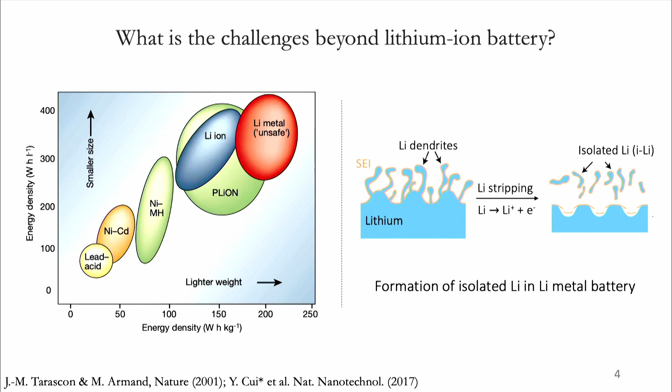So we were thinking, is there any way that we can recover this part of capacity just using an electrochemical method? This is the fundamental question that we want to ask.

So we started our project by looking at the electrochemical potential inside a battery. Here on the left we have the cathode, and on the right we have the anode. The cathode's electrochemical potential is higher than that of the anode. At open circuit voltage, when we are not using the battery, there is a flat line in the electrolyte in between them, so no electron is moving.

Things start to change when we charge the battery. Here we are showing the charging process: we elevate the electrochemical potential of the cathode while lowering that of the anode. By doing so, we drive the electrons through the external circuit, but at the same time we are generating an electric potential gradient inside the battery, as shown here.

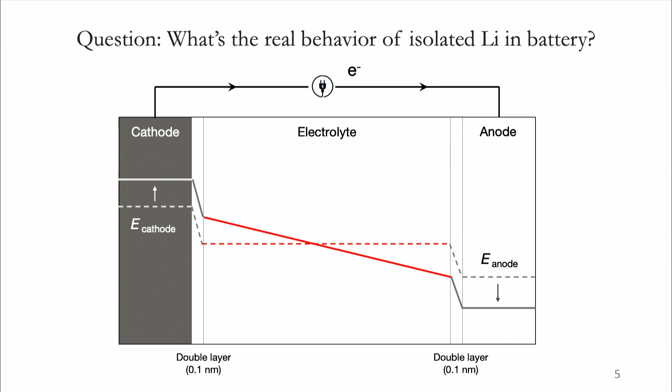What if at this time we have a lithium filament in this electric field? Will this have any influence on its behavior? That's the question we are trying to address here.

Here is a simplistic illustration of the scenario we're imagining. We have the cathode and the anode, and some isolated lithium that formed during the previous charging and discharging process. It's embedded either within the solid electrolyte interface or in the electrolyte.

During the charging process, we have an electric field pointing from the cathode to the anode. But lithium is an electron conductor, a very good one, so it will be polarized by this electric field, generating surface charges on both of its surfaces.

On one side, it will have a large accumulation of negative charge, and on the other side, an accumulation of positive charge, or electron holes. This kind of accumulation of positive or negative charge will disturb the equilibrium state at this interface.

The accumulation of negative charge will drive the lithium ions in the electrolyte to be deposited onto this filament. On the reverse side, the accumulation of positive charge will drive the lithium metal to dissolve into the electrolyte. The net outcome of this asymmetric deposition and dissolution is a spatial dislocation of this filament toward one of the electrodes.

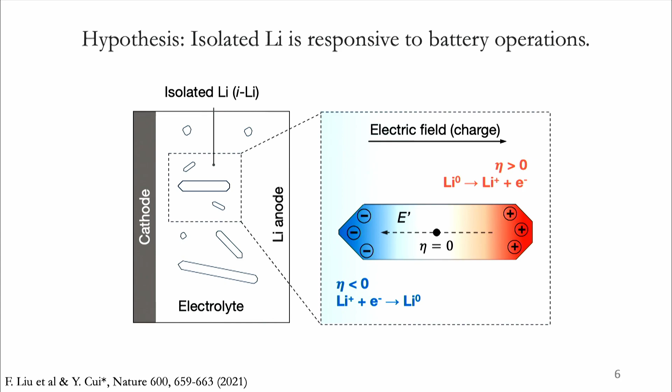For the case we're seeing here during the charging process, it moves toward the cathode side. During the reverse process, during discharging, it moves toward the anode side.

So this is based on hypothesis. How about - can we observe it? Before we designed our own setup device, we looked at literature to see what people have been observing for the last 20 or 30 years.

This is work done at the University of Michigan. They looked at the surface of lithium and the electrolyte during the lithium deposition process. You can see the formation of mossy lithium during the deposition process and also its dissolution process. This kind of mossy lithium consists of thousands of lithium filaments, and we are seeing it under an optical microscope.

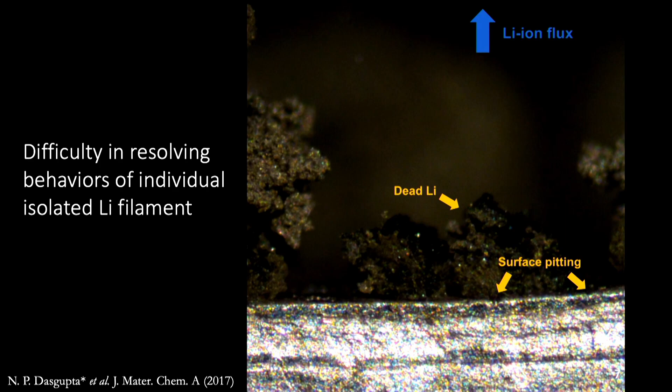As you can see here, it's really hard to tell which filament is connected and which is not. It's even harder, or nearly impossible, to see whether they have any kind of movement. That's why, for the last 30 years, we have formed this consensus that once those isolated lithium become detached from the surface of the electrode, this part of capacity is permanently lost. We also gave it the name dead lithium.

So instead of using a two-electrode structure, we designed our own device with a third electrode in between them. We patterned a copper strip as an island between two electrodes, lithium and NMC cathode, and then we electrochemically deposited lithium metal on it to serve as a lithium island.

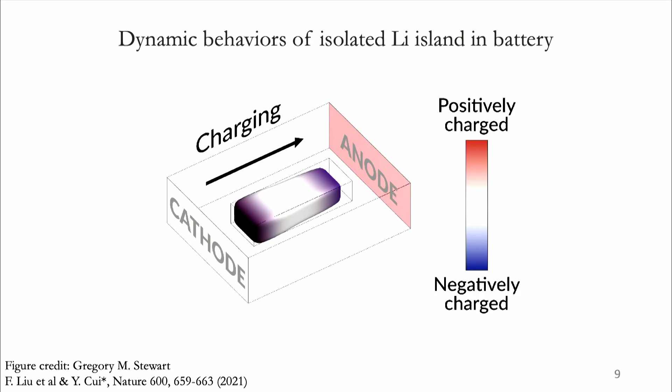If we put those observed phenomena together, it's like if we use the same current density during charging and discharging, this lithium filament will move back and forth between the two electrodes until it's completely consumed. But our opportunity also lies in this phenomenon, because the rate of this movement is dependent on the current density. So what we're trying to see is whether it's possible to manipulate the behavior of the filament to help it move toward the anode side, to reestablish this electrical connection and recover this partial capacity.

This is one of the demonstration experiments we did with half cells. Half cells are based on copper and lithium, to eliminate the influence of the cathode part. Basically, the performance we're looking at is on the copper side.

During this experiment, in the first cycle we want to form a certain amount of dead lithium, or isolated lithium, on the copper electrode, and during the second cycle we want to see whether we can recover it. During the first cycle, we form 0.37 milliamp-hour per square centimeter of isolated lithium on the copper electrode, and during the second cycle we still do deposition, meaning we are charging the battery.

Now we are gradually lowering the cell voltage or the electrochemical potential of copper to deposit a certain amount of fresh lithium onto the substrate. Then we start to strip it away using an electrochemical method. But during this time, we are not only stripping away the fresh lithium we just deposited, we are also promoting the growth of isolated lithium toward the copper substrate. That's why we're seeing over 100% Coulombic efficiency in this case.

Coulombic efficiency is the ratio between delivered capacity versus stored capacity. That means the previous inactive capacity is actually being reactivated during the second cycle. Without isolated lithium presence, the Coulombic efficiency of the batteries is usually about 92 to 93%. The difference between those two cells is the capacity we generated during this cycle.

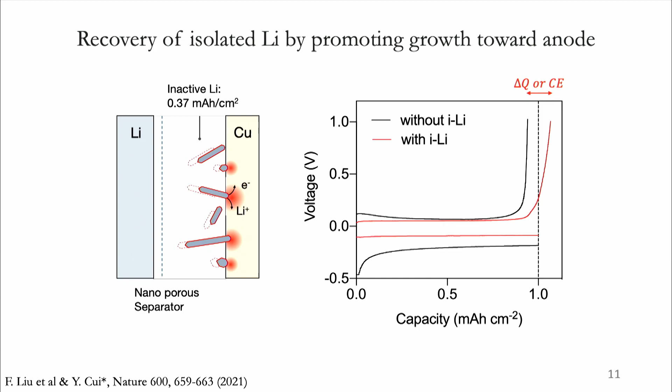So this is a very newly discovered electrochemical phenomenon. How can we use this kind of phenomenon in real applications? Here I want to give you 3 examples. The first one is lithium metal batteries, where we actually studied it.

To utilize this fundamental research, we developed a new charging protocol to implement this understanding. Not only do we want to charge the battery, but we also want to implement a short, fast discharging step to recover the previous lost capacity. By doing so, during every cycle we use about 4% of battery capacity, but in the long run we extend the battery lifetime by 30%.

Another example is fast charging of lithium-ion batteries. This is one of the major concerns from customers hesitant to purchase electric vehicles. During this fast charging process, isolated lithium also forms on the graphite electrode. But by using this kind of activation protocol, we can dramatically extend the lifetime of lithium-ion batteries even after the fast charging process. Another potential application would be to regenerate or recycle used batteries.

This can become extremely important after a few years when we have a large amount of batteries retired from transportation. What if, before recycling them, we just draw out the raw materials from the batteries? Can we give them a second life just using an electrochemical method? And that's something we think

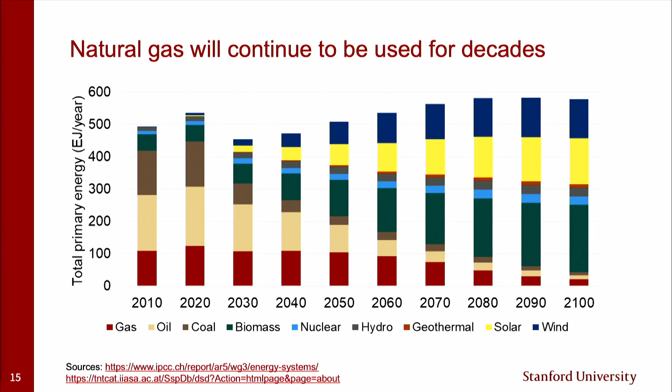Therefore, it is important that, now that we are still using and producing this much natural gas, how can we limit the climate impact of producing them? What is the climate impact of producing natural gas?

In 2010, the IPCC estimate for global anthropogenic greenhouse gas emissions is about 50 gigatons of CO2 equivalent. Although CO2 contributes the most of it, methane, or CH4, also contributes a significant 16%. About 1/10 of that global CH4 emissions are from the US. The US EPA, Environmental Protection Agency, estimated that about 32% of US methane emissions are from the oil and gas sector. So if we apply this share of methane emissions from oil and gas globally, this can easily become a gigaton challenge in terms of CO2 equivalent.

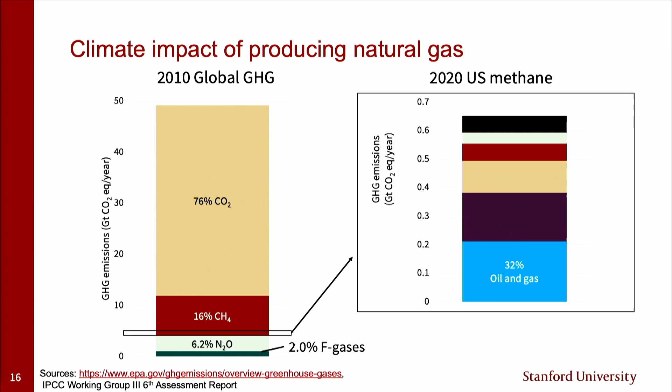Actually, to say this is a gigaton challenge is an understatement for at least 2 reasons. Number one, this chart converts the CH4 into CO2 equivalent, assuming methane's global warming potential of 100 years at about 30. However, due to the relatively shorter lifetime of methane in the atmosphere, curbing methane emissions can have more immediate climate benefits. If we apply a 20-year methane global warming potential of over 80, then the climate impacts of methane here will increase by 3-fold.

And the other reason for an underestimate is that we know for a fact that this number estimated by EPA is an underestimate. So how much methane is actually emitted from the US gas supply chain?

In 2015, the EPA Greenhouse Gas Inventory, or GHGI, estimated 8 megatons of methane emitted from the oil and gas sector. For the same year, Alvarez et al. compiled more recent studies and generated an estimate, widely accepted in academia, saying that actually more than 60% above the EPA estimate, or 13 megatons in total, is emitted from the system.

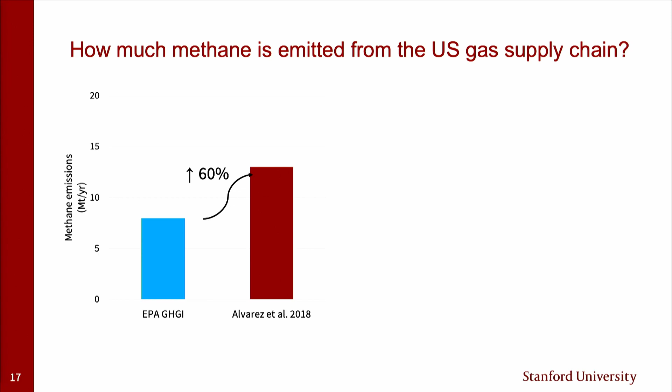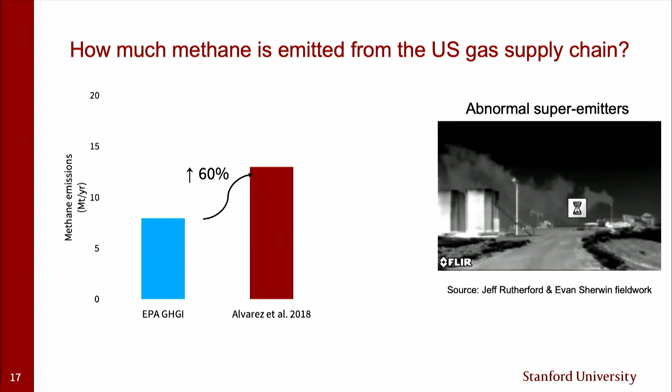However, more recently, we have found that there are many more super emitters, as shown in this infrared footage done by Jeff and Evan of our group, showing that these abnormal super-emitting events—of sizes of tons per hour, or even tens or hundreds of tons per hour—are actually more common than we expected. Although these events are rare, because of their huge sizes they can contribute disproportionately to total emissions. If we take into account these abnormal super emitters, we know the actual total emissions from oil and gas methane will actually be higher. But the question is, higher by how much?

And a large sample is important because we are interested in detecting and understanding these infrequent super-emitting events.

So we, as the Stanford team—the Environmental Assessment and Optimization Group led by Professor Adam Brandt—verified the quantification performance of their technology via single-blind controlled releases of methane. We on the ground released compressed natural gas from tanks, and they on the airplane measured it and reported to us what they found. What we found is that the technology works great.

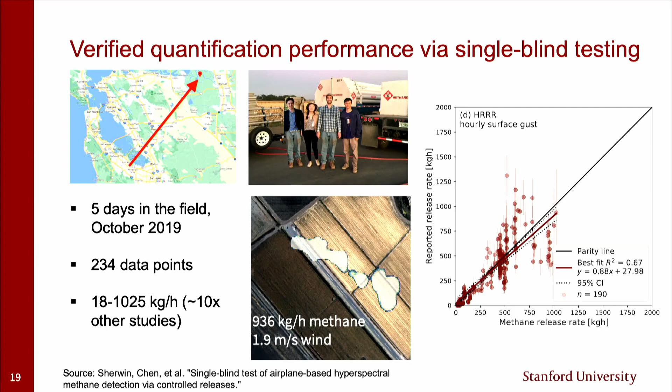So Kairos Aerospace repeatedly visited the oil and gas facilities in the New Mexico Permian Basin. The Permian Basin is now the largest and fastest growing oil and gas producing basin in the US. The way they sample this area is like this: they first fly to the predetermined polygon and cover a stripe of it, then turn the flight around to cover a partially overlapping stripe. They do this over and over again until the entire polygon is covered in a long mowing-lawn fashion.

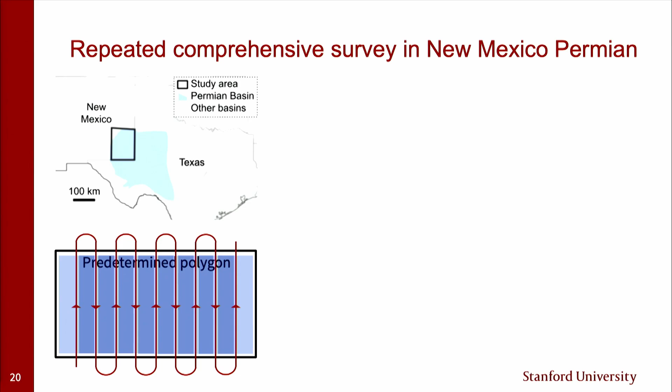Within just 115 flight days, from October 2018 to January 2020, Kairos was able to cover over 90% of the facilities in this area, which encompasses over 30,000 wells and over 15,000 kilometers of pipelines. The color on this map indicates the number of visits to these individual wells. On average, each well in this area was visited 4 times. Not only is this a comprehensive survey, it's also a repeated comprehensive survey, which has never been done before.

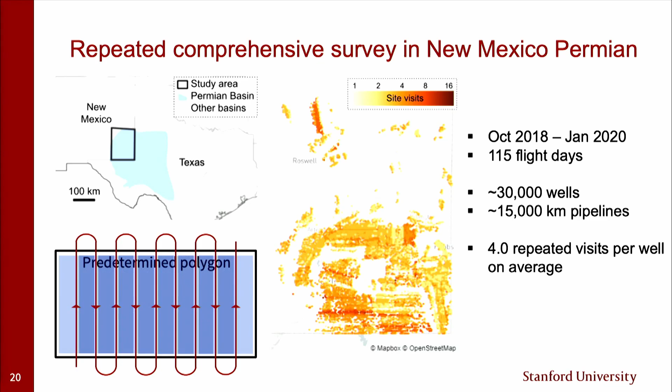What we found was that the data from this survey is quite astonishing. In total, we quantified 153 tons per hour of directly measured emissions in this area. We also measured the total emissions, which takes into account emissions below Kairos's detection threshold and from assets not covered by Kairos in this area. 194 tons per hour of methane corresponds to 9.4% of the gas production here, which is much worse than the EPA's GHGI estimate of just 30 tons per hour—and that 30 tons per hour is even after accounting for recent production growth in this area.

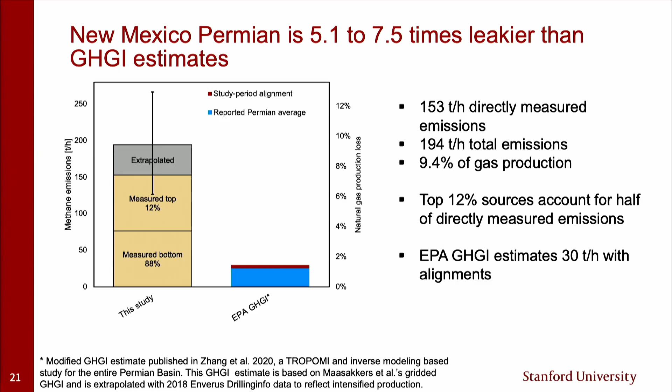What's also interesting to point out is that the top 12% of the sources detected by Kairos account for about half of directly measured emissions. This is actually good news and bad news. It's bad news because we know that EPA misses these infrequent events, but these infrequent events—the top 12%—are actually what matters and what drives total emissions. It's good news because once we handle this handful of these super-emitting events, we can get halfway there on emission mitigation.

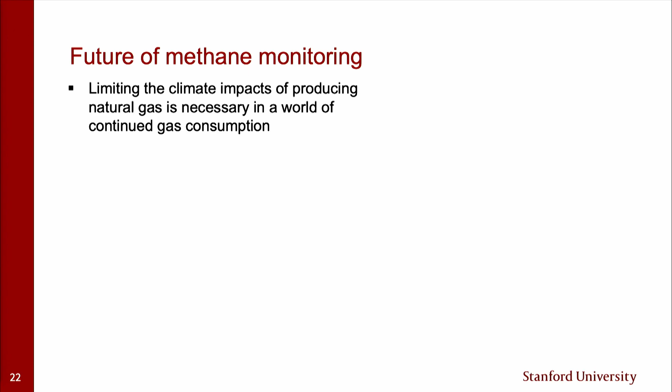So to conclude, we know that limiting the climate impacts of producing natural gas is necessary in a world of continued gas consumption. And aerial surveys have unfortunately unveiled a leakier system, at least in New Mexico's Permian Basin in 2019. The entire situation is quite concerning.

Some producers are better than others, but overall, the actual methane emissions from oil and gas can be 5.1 to 7.5 times higher than the EPA estimate. And we also found that the aerially detectable super-emitters account for the vast majority of total emissions.

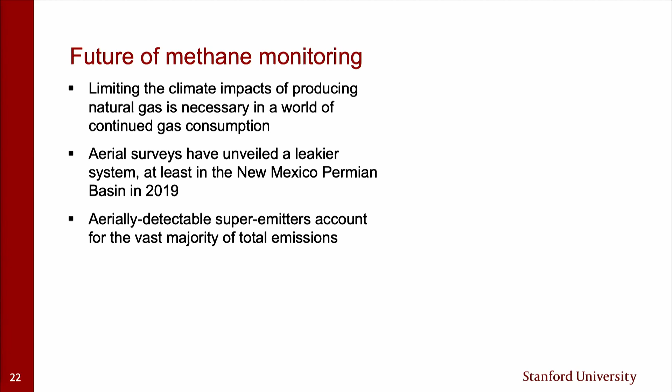And what that tells us is that if we want to build a global methane monitoring system, then we need to have more of these remote sensing technologies in place.

Our group here at Stanford is testing a series of remote sensing technologies via single-blind controlled releases of gas right now. As I'm talking, my fellow PhD students and postdocs are in the desert in Arizona, playing with release apparatus and sandstorms to have all these technologies tested and deployed.

And thank you for listening.

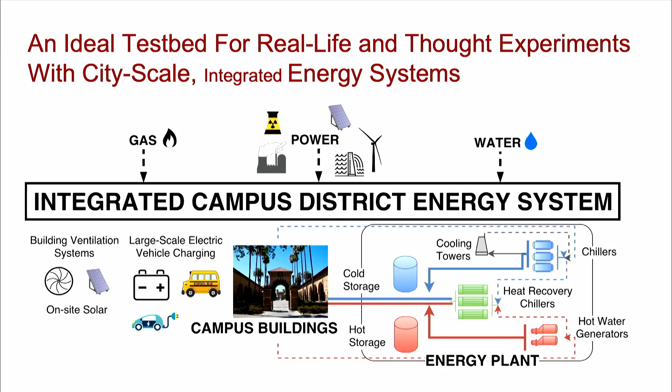The first source of flexibility I'd like to explore is in scheduling the machines in that central energy plant. So first, a real-world experiment.

The flexibility for responding to these events was mostly coming from the thermal energy storage tanks, big insulated steel tanks with water that you see on the right. And we also developed prototype software tools to help us schedule the facility and respond to these events.

So here you can see we successfully responded to three events that were called by the utility.

So next, I'd like to talk about some options that are available today, but will really be more available tomorrow given investment. And the black box I'd like to open next is the energy consumption of the buildings, specifically cooling, that so far I've assumed is inflexible, just something that I have to respond to.

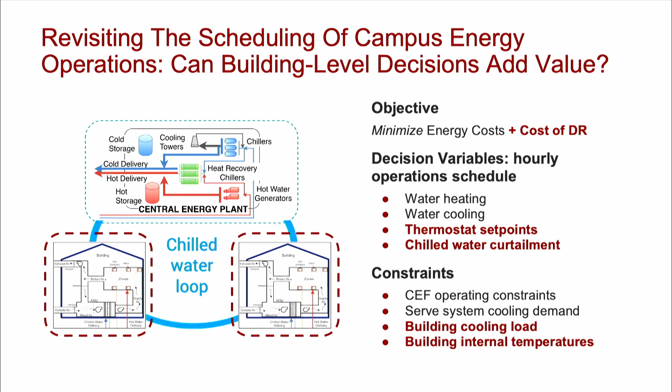So this is going to change the decision-making problem that the district energy system operator is facing, because now I can call on thermal demand response. And this is going to introduce new cost functions, decision variables, and operating constraints for each of the 130 buildings on campus. So it's going to complicate my problem.

The buildings I'm considering are commercial buildings. Cooling comes in the form of chilled water used to cool down air, which is then sent to different thermal zones in the building. Weather, occupancy, building control systems, and physical characteristics all interact to determine the building's cooling load, which is why this question isn't as easy as it seems.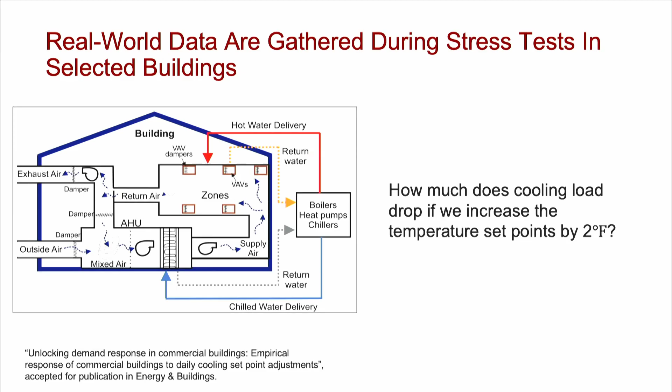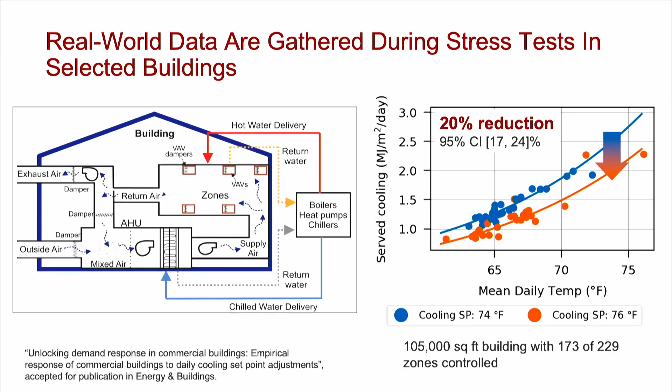If I increase the temperature set points in a subset of zones by 2 degrees Fahrenheit, how much does the cooling load drop? We tested some buildings. Here's data for a building on the engineering quad. The y-axis is daily cooling load, the x-axis is mean daily temperature from our Stanford weather station, each dot representing one day's data. Blue dots are our low temperature set point, 74, and red dots are 2 degrees higher. The difference between the two curves is our estimated flexibility for this building, 20%.

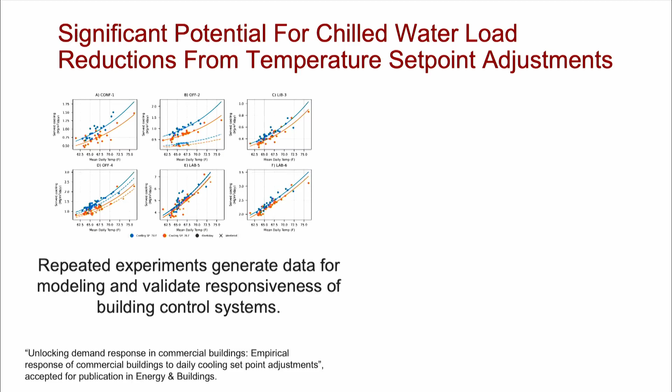We tested multiple buildings on campus: 3 in 2020, 6 in 2021, 11 just this summer. But testing all 130 buildings on campus would be very costly, and by that point we'd have already implemented the program. So we also developed methods to extrapolate results from tested buildings to untested buildings to estimate campus-wide impacts.

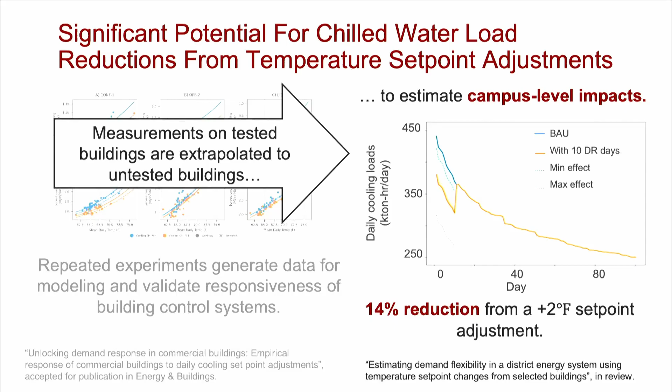This plot shows a load duration curve for chilled water. I'm looking at each day's cooling demand for the campus and ranking them from highest to lowest, left to right. The blue curve is business as usual. The orange curve is what we think we can do with 10 days of demand response. One important takeaway: this would lower our capacity requirements for infrastructure by 14%. That's where the big savings are.

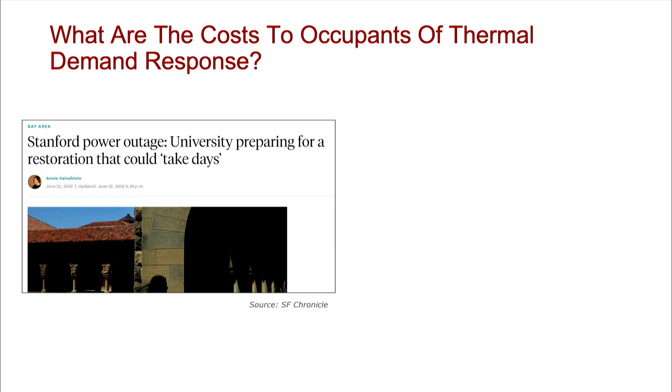One last question we're just starting to explore: what are the costs to occupants? Earlier in the summer, there was a power outage, and I was on campus at a conference just like this one. When the outage happened, it got very hot in that room because it was hot outside. The following day, we sent a survey to participants asking about their willingness to accept cooling load service interruptions similar to what we'd just experienced, assuming it would lead to lower energy costs and environmental benefits for the campus.

A few interesting things came out of the 21 responses we got. First, there was a lot of support for the program—maybe not so unexpected. Second, support drops if you call on the service more often. Third, and most interesting to me, there's a big difference depending on whether you call on the service the day of versus the day before.

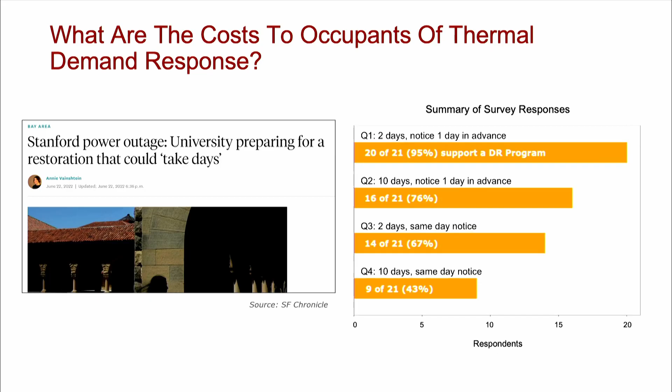So finally, I'll leave you with these three messages: the electric grid is changing, so we're going to need flexibility. There's already a lot of flexibility in the system today, and given investment, much more flexibility can be available tomorrow.

Thanks. Thank you, Jacques.

In some days of the year, there's not enough capacity to cover those high evening peaks. So we looked at how much grid storage you'd need to add to shift around generation and cover those peaks. As you increase the number of EVs on the road, the amount of storage needed increases as well, but not evenly across scenarios. The scenarios with universal home charging, high home charging access, needed more storage to cover those peaks, and the scenarios with lots of daytime charging needed less storage.

We also found a 56% reduction in storage needed by switching from the universal home case to low home charging cases. We also looked at control, and that 9 p.m. timer I talked about was particularly bad because it creates a really big spike in the evening.

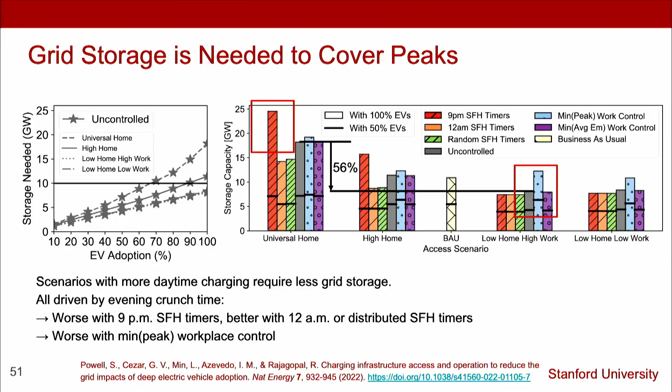The workplace control we looked at spreads a lot of charging demand through the day towards that crunch period in the late afternoon, early evening, so that also increased the demand for storage.

Finally, I'll talk a little bit about emissions. This is operating emissions, grams of CO2 per mile traveled. On the left first, this is the base case grid we looked at for 2035, and you can see the two daytime charging scenarios have the lowest emissions per mile. As you increase the amount of home charging used, emissions increase as well. It's about a 5% difference between the worst and the best case.

But we tested a sensitivity where you had more renewables in the grid by 2035, and there the difference grows. So as we have more and more renewables, charging during the day becomes more important in the Western US.

This was the really big conclusion of our study, which is listed at the bottom, available open access — you can go and read it and find all the details there. The big conclusion was that daytime charging infrastructure, having more daytime charging, improved every measure of grid impact that we studied. So this is a really important conclusion for policymakers looking to invest and build all the thousands of charging stations we need to put in before 2035. The more daytime charging infrastructure, the easier this will be for the grid.

We also looked at control, and it made a much smaller difference than changing charging infrastructure. So there's a lot of work left to do. We're looking at doing this for other regions, maybe countries in Europe, maybe other parts of the US, looking at designing rates so that the controls work better, looking at how this affects grid planning. So if you're interested, would like to talk, would like to get involved, please don't hesitate to contact me. Thank you.